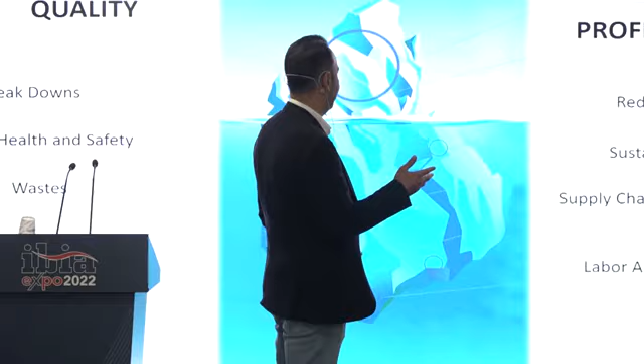All of us are trying to handle the business about quality, efficiency, and profitability, and this is like an iceberg, but there is another big part of the iceberg that we cannot see. If you want to get efficiency, profitability, and quality, you also have to fix many other issues to reach the perfect point.

The cost of a mattress is roughly around 87% from material cost, and 13% from labor cost and general production costs.

Where there is a product for the customer, there is a value stream, and the competition is about learning to see this. Some of the operations are non-value added and some are value added. If you can cut some non-value-added operations, you can fix your cost, your efficiency, and your quality.

Here I will mention three different aspects for efficiency: first is balancing, second is reducing the 7 wastes, and the third is work ergonomics.

Can we go back one slide? First, balancing. The red line is the takt time. Takt time means the period, the frequency of what the customer wants from you, and you have to balance all of your operations according to your takt time.

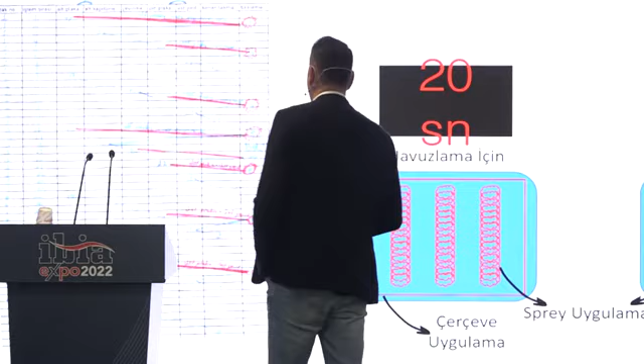So you have to look at all of your operations in detail, and for every step, for every second, you have to measure and analyze what the opportunities are to cut or combine operations together.

Here you can see one balancing sample. Before balancing, there is a small operation with 5 employees, and you see the unbalancing points in the graphic. You have to look, as I said, in great detail.

After the balancing, you can see the operation reduced from 5 employees to 4 employees, and the ratio of cycle time to actual takt time is 100%. So you can cut 20% from your labor cost.

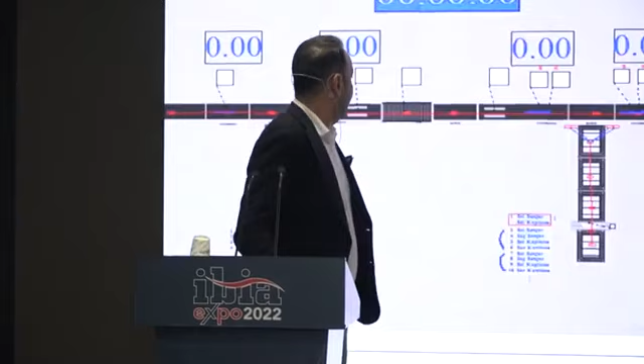And another point - yes, we said Human 5.0 - but you can also use some digital tools to understand and be sure you're making the right balancing with your operations. You can use different software like Rockwell Arena or Visual Components. Some of them have really nice HMIs.

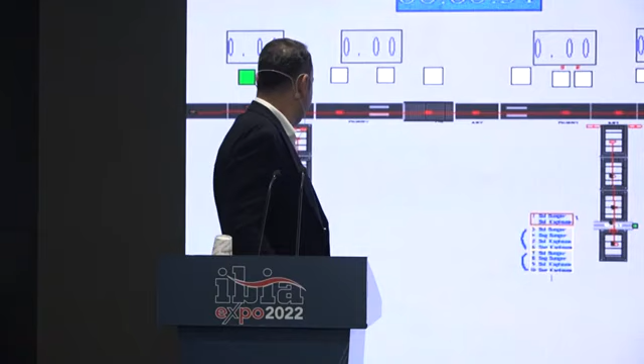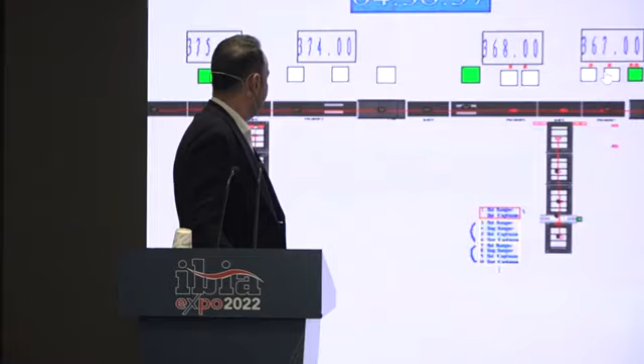This is the first simulation of our mattress line, what we measure before we design the mattress assembly line, to see how many mattresses we can produce. After that we sign the contract and go on to production. As you can see, it shows for an 8-hour shift how many mattresses you can produce.

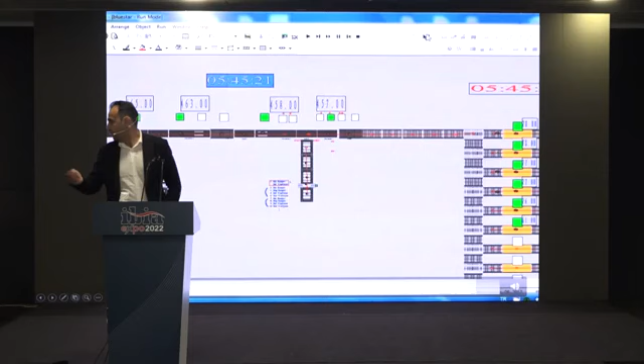Let's move to the next one. And the most important point after the simulation is that all the loading has to be equal or close for every workstation.

The second point is reducing the 7 wastes. It's a main principle of lean production, the Toyota way. Inventory - too much inventory is a waste. Waiting is a waste. Defects and reworks are waste. Overproduction, overmotion, transportation, overprocessing - all of these are the 7 sins for production companies.

So you have to look at where you are losing, which points make you waste and inefficient.

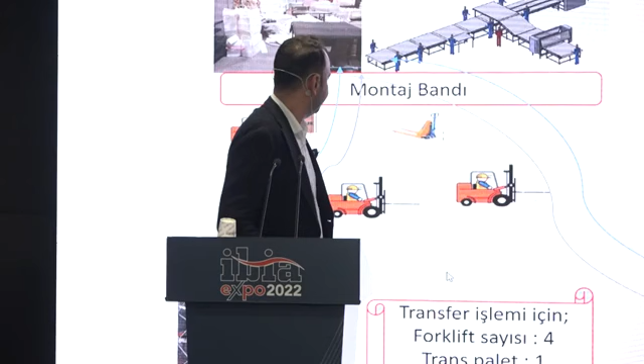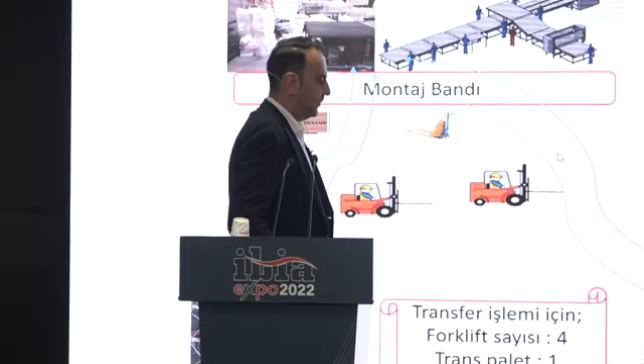For example, thanks to our team, they made an analysis about feeding the inner spring units to the assembly line. They made detailed analysis, spaghetti diagrams, and did brainstorming together, giving importance and assessing the difficulty of these potential solutions.

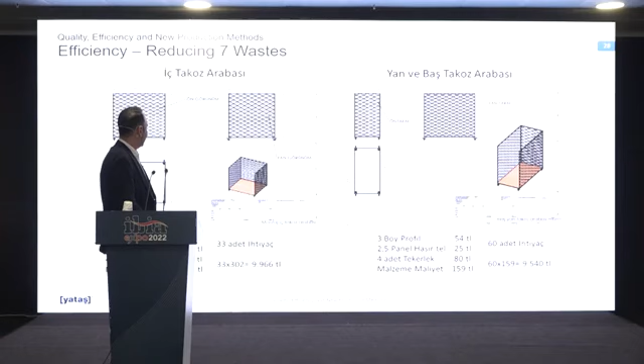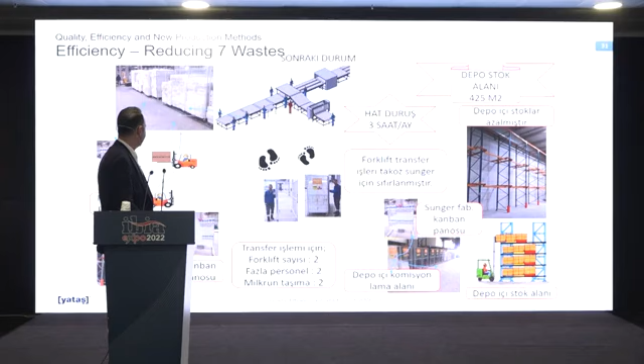After that, they accepted to start a Kanban project, and they designed special carriers for the side rails. They designed Kanban cards, and they reduced the over-motion and inner transportation to zero.

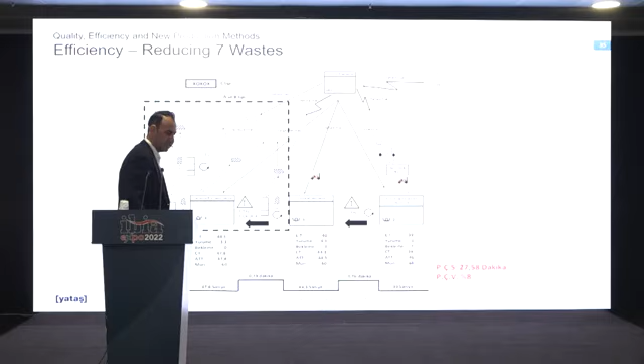At the second point, now you are seeing the value stream map for the current situation, and here is the next situation. They changed the system completely from a push system to a pull system.

Another important point is standard job. It means if any operation is made by anybody, every time, at any time, everybody has to do the same thing in the same way, in the same method, and at the same time. So it always aims to reduce the differentiation and the standard deviation from person to person, operation to operation.

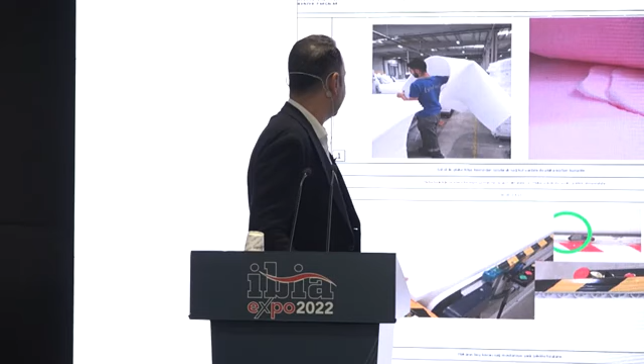And now you are seeing some of our standard operation sheets. For example, you can see what the tip point is to do this operation, where they have to be aware about the operation, what the critical point is, and what time they have to start and finish this operation.

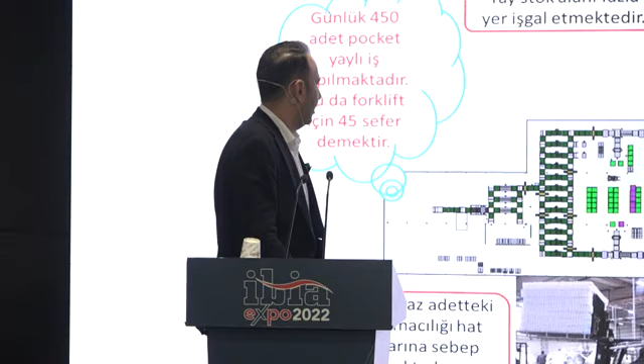Another point, they also saw a waste in moving and handling the roll pack pocket spring units to the assembly line. You see the spaghetti diagram.

They also made the brainstorming again, and they found a solution to integrate a bale opener and roll opener to the assembly line. They added some extra conveyor belts to fix the operation at the same time.

And you see the efficiency loss, the waitings decrease to 70% less.

The other point, as we are mattress producers, all of us are serving many different markets, and all the markets need different types of mattresses. Some markets need inner spring mattresses, some need foam core mattresses. This means much more SKUs, much more models, meaning much more changeover and much more setup. And every setup, if you cannot do it in a short time, means a break and an unplanned stop.

Now I will show you a video from Formula. First, you will see a video from the 1950s, and after that, you will see the new version of the pit stop at Formula from the 2010s.

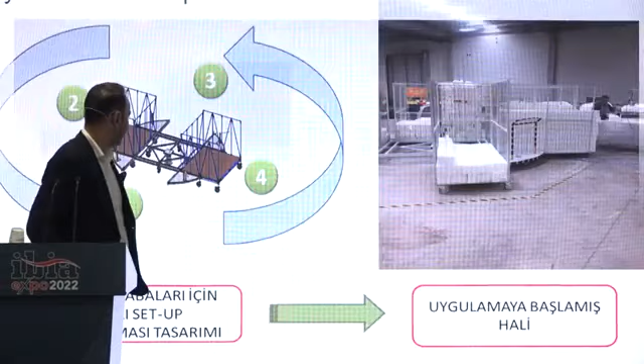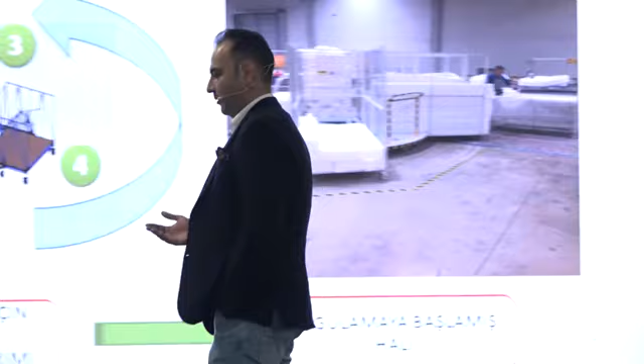So reducing the setup times and changeover times is really critical for our industry because of our product range and our product variety. We have to change from one model to one batch to another batch in seconds. So that's just a simple example of what they are doing at Yataş.

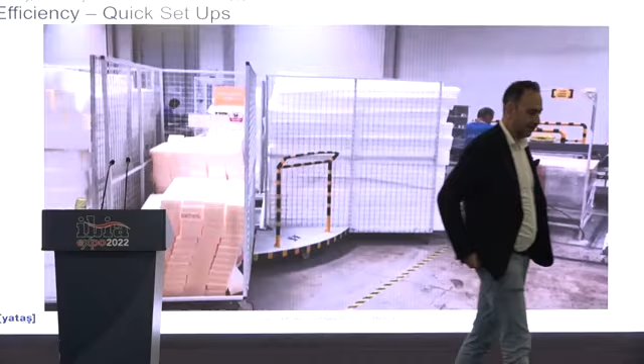We are producing 100% foam encased mattresses. This video shows one-piece flow and also shows SMED, single-minute exchange of dies. Now he's preparing the mattress side rails, and after that he's changing to another model, another size, so he has to use other side rails.

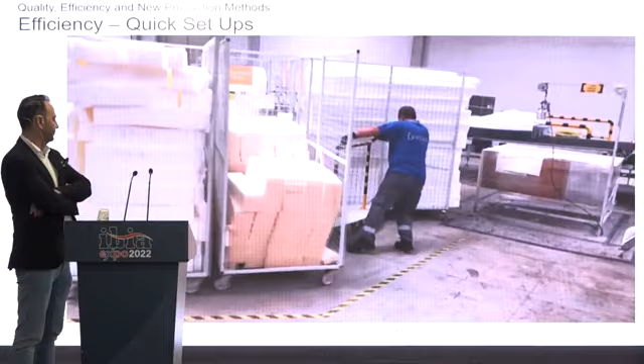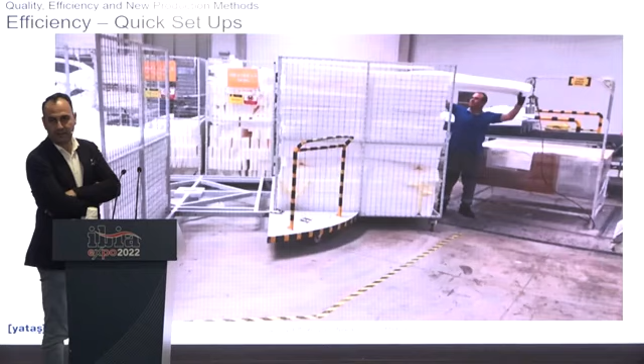Now he switched the other batch to the other size. It's easy and lean.

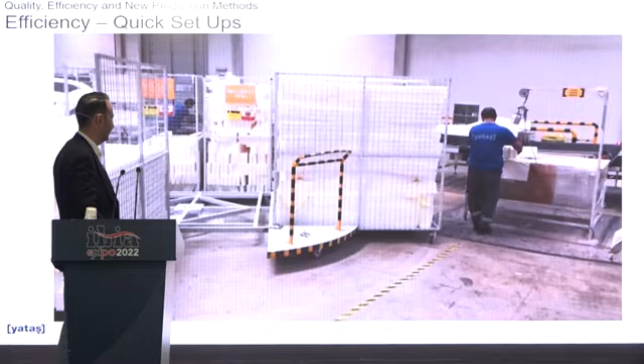Another point is we are working with really expensive equipment, and every piece of equipment has too many different electronic sensors, some controllers, too many mechanisms, too many mechanics, and you have to care about the condition of your machines for maintenance.

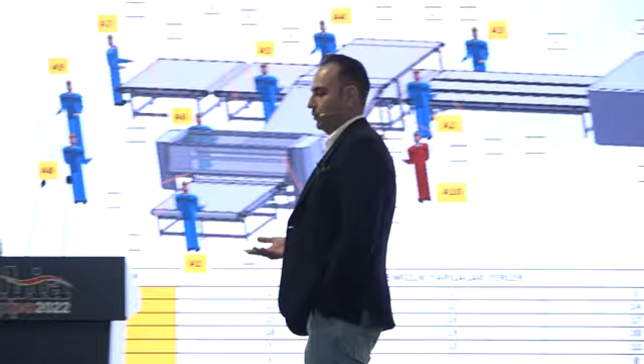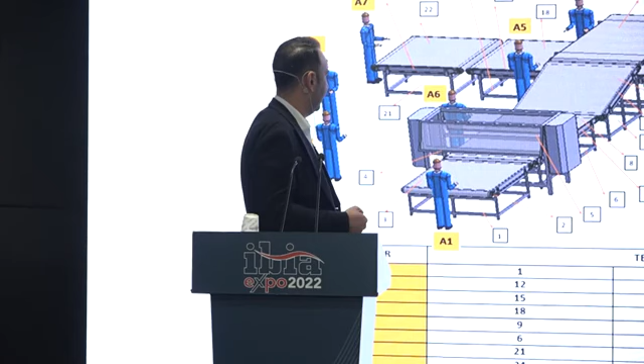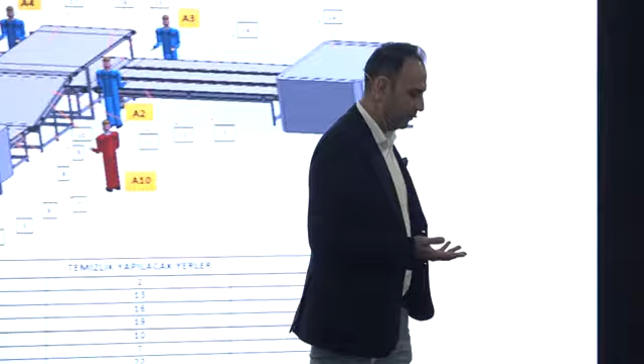With unplanned breakdowns comes unplanned stops, meaning efficiency loss. So to reduce breakdowns, broken parts, and sensor issues, you have to clean your machines, control the critical points of your machines, tighten some of the screws, and make regular lubrication to reduce the breakdowns.

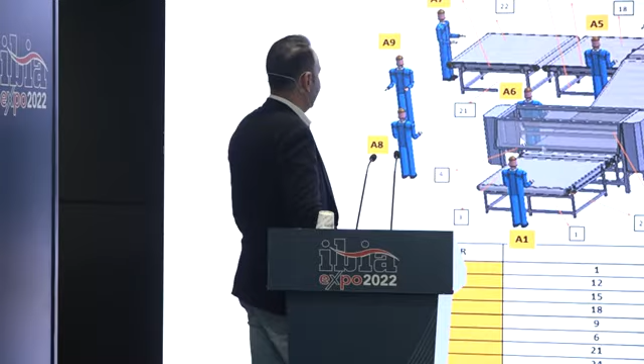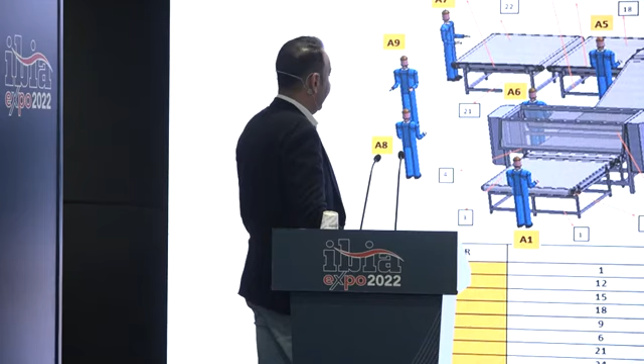And now, at this assembly line, you are seeing every person has a number, has a code, and every person, every shift, at different days, they have to clean different points, they have to check, control, tighten, and lubricate different points at the assembly lines.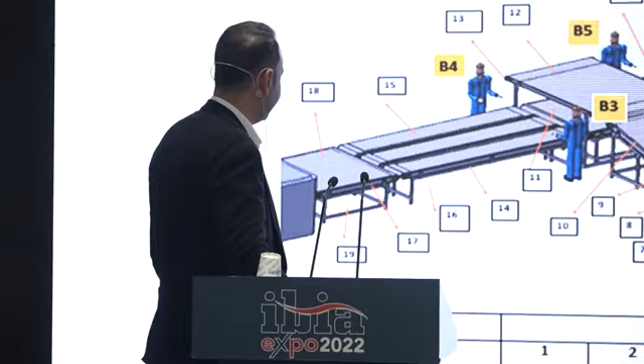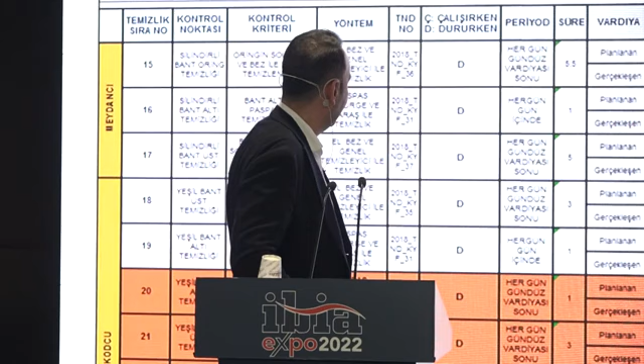We are detailing all these points, how they have to clean, what they have to use, and we are giving detailed one-point lessons. And you see the trend of these timing lines, how that's going.

Another point is escalation. If there is any break, any unplanned stop, there is an escalation chart to inform at a path. And Lord Kelvin says, if you cannot measure it, you cannot improve it. Peter Drucker, the famous management consultant, says if you cannot measure it, you cannot manage it.

So manufacturing execution systems and IoT, also Serkan mentioned at his presentation, is really important for us to see. We are collecting data from our production lines, and also another point, we have an andon button.

If there is any abnormality, if the person sees any abnormality, he is pushing this button and we completely stop the line. We have a horn and a lightning, and the supervisor of the line is going to that point and asking, how can I help you? We call it stop for don't stop.

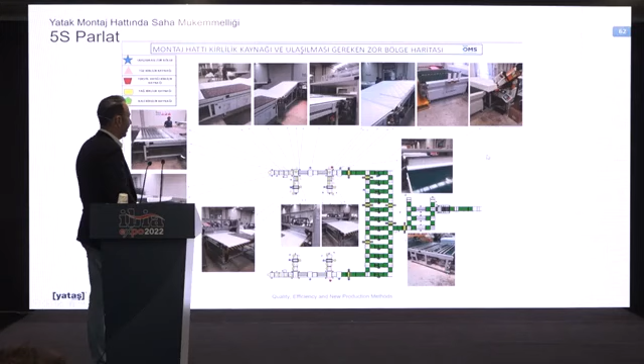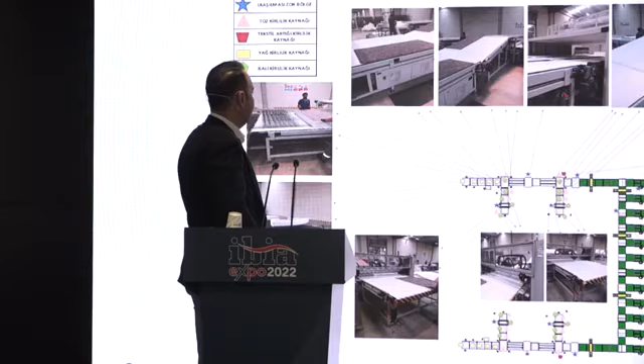Here you are seeing a map at which point of our production lines, what kind of dirtiness sources we have, and we are measuring how many minutes we are expending to clean these points and to control these points, and our aim is to reduce the source of the dirtiness.

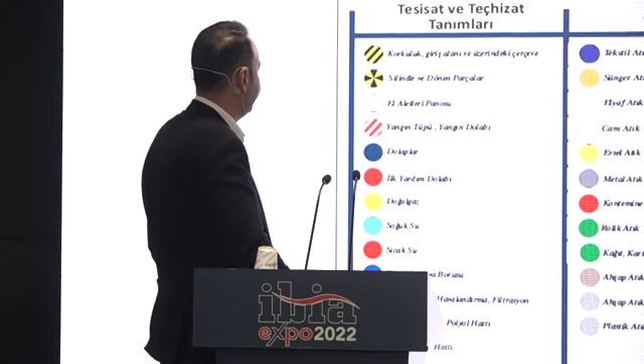Here is another example, and this is our visual plant standards. Some of the examples from our 5S applies.

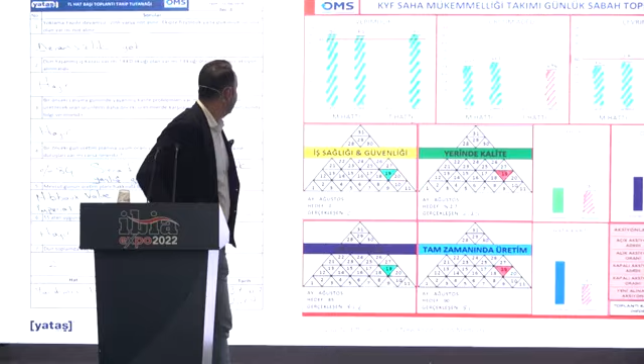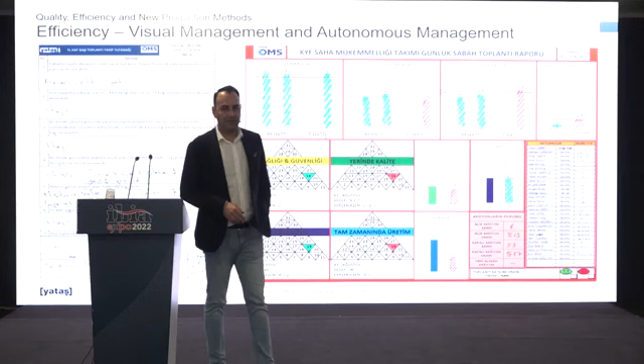Also, another point as I mentioned before, visual management and autonomous management. We are collecting data and we are looking at reports, and we are talking about it, what we can do together to solve and do it better.

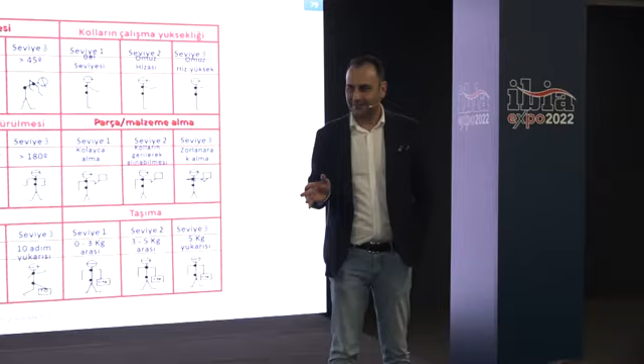Another point is work ergonomics. Yes, as the mattress industry we are better than the furniture industry, we have much more automation and automated products and machines. But we are still using too many labor and manpower, so ergonomics are so important. You have to look at all of your operations from the ergonomics perspective.

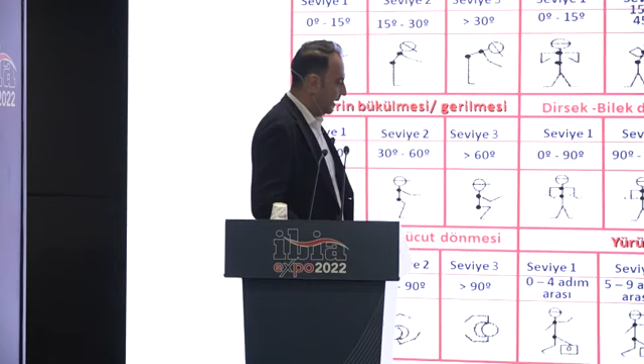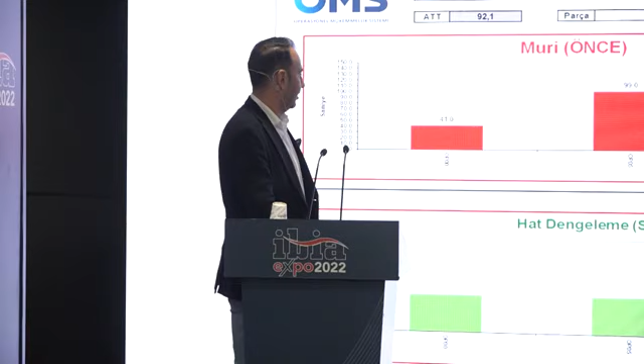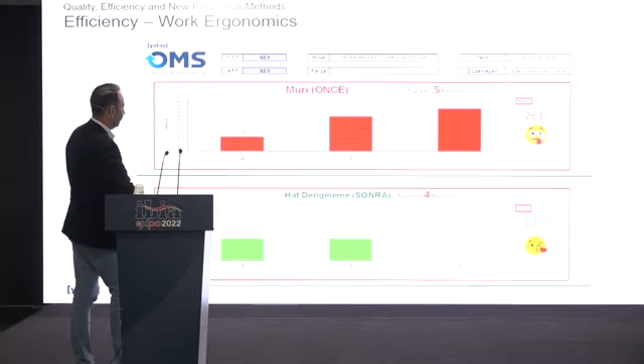As you can see from this chart, every motion, every position has a hardness point, and you have to look at your operations. This is before the improvement; the total score for these three operations was 261, and after the improvement we came down to 120. We balanced the hardness of the operations at every station to be the same, and we also eliminated the third operation.

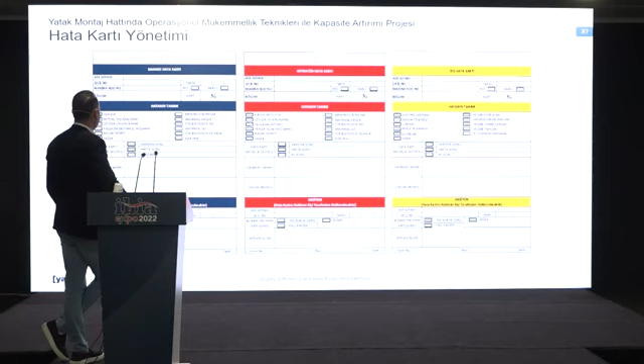Another point is autonomous maintenance, also called TPM, total productive maintenance. These are the fault cards. We have three different kinds: the blue ones for the maintenance guys, the red ones for the operators, and the yellow ones for health and safety for the labor. These are the most important ones.

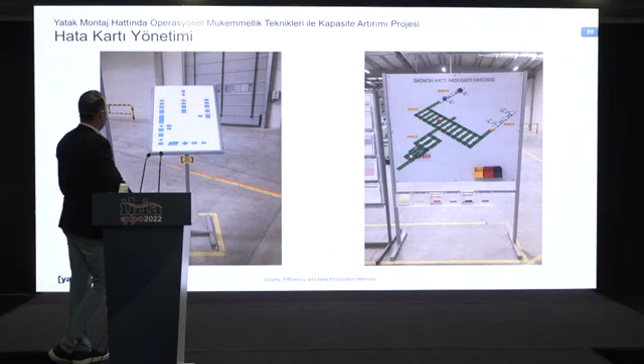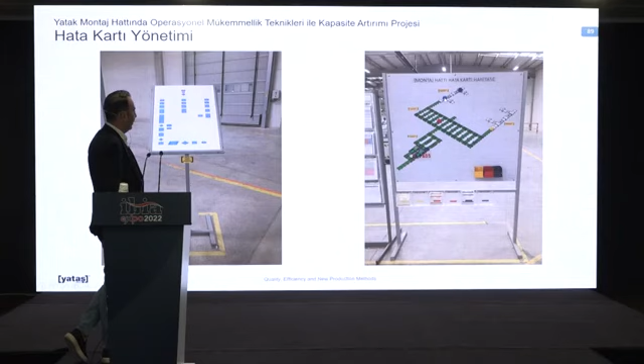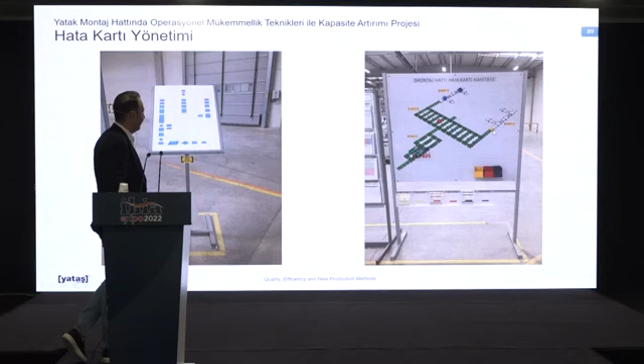We have to solve the yellow ones the same day. We use these cards, hanging them where we see the problem, and also pointing from the layout. Now you are seeing 1, 2, 3 maintenance fault cards, 1 operator fault card, and 1 health and safety fault card. This graphic shows when we hang the card and when we unhang it.

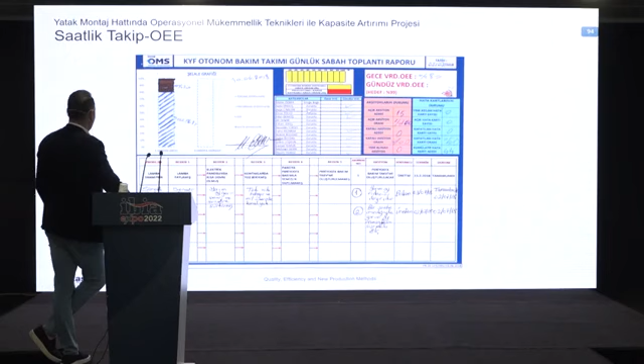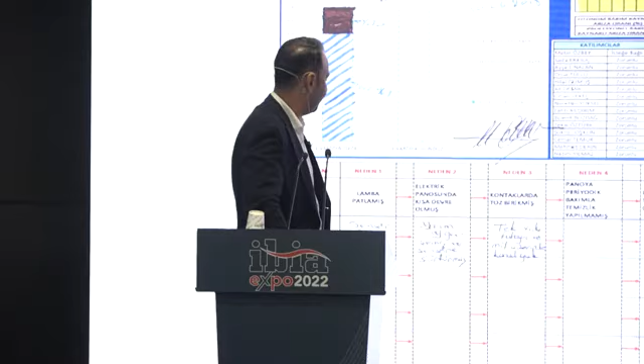Also, you have to talk about maintenance and the breakdowns for the machines. We talk every morning about every problem with the maintenance. If we had a problem, we always ask 5 times why. This 5-why analysis always aims to find the source, the real source of the breakdown.

You are seeing little kaizens from the Gemba.

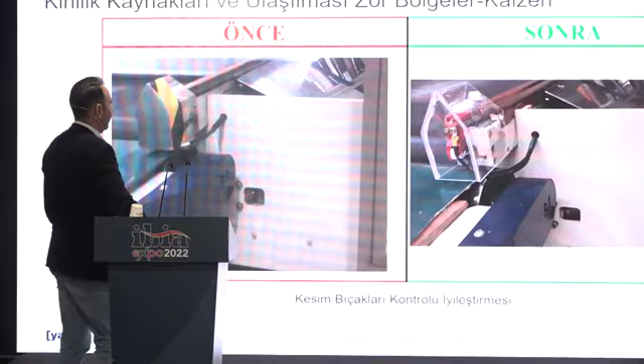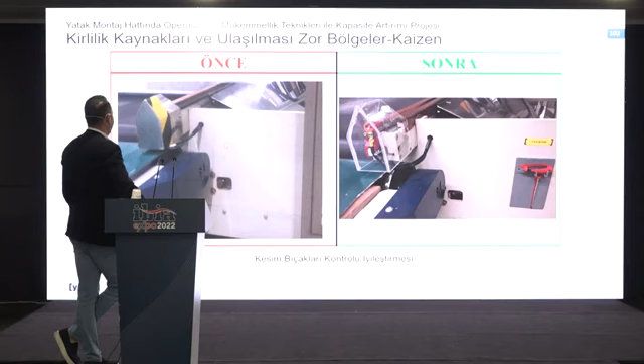There is another kaizen. Before, we couldn't see inside the knife unit, and if there was a problem with the angle of the knife, we couldn't sense it. Now, if there is a problem, we can see it.

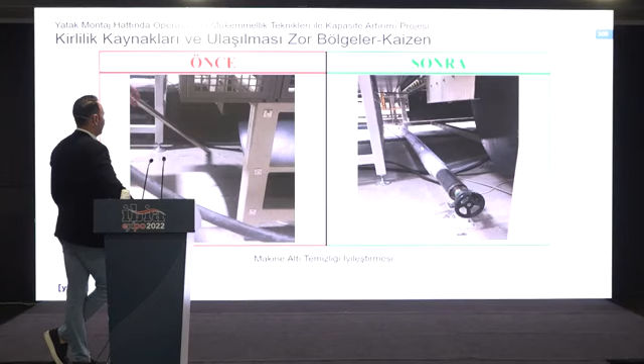And this is another kaizen to clean the bottom side of the machine.

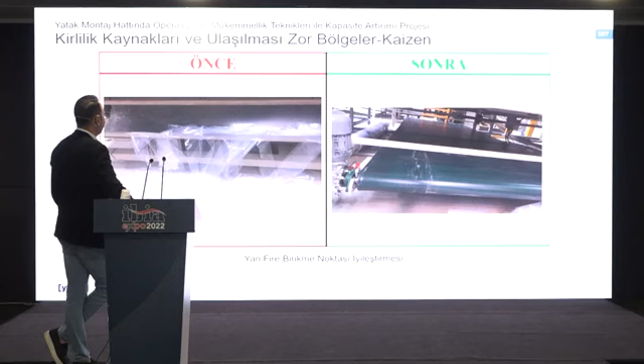This is a kaizen to collect the side waste of the polyethylene film. This is another kaizen to fix the lubrication and control points of the machine.

From 30 minutes, we decreased the time to 8.9 minutes.

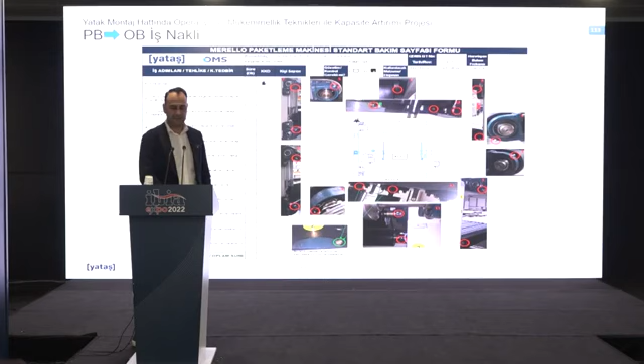These are the standard maintenance sheets for our maintenance guys for critical machines and critical parts. If there is a problem at that critical machine, every maintenance staff is making the right operation, as written here. And these show the lubrication points.

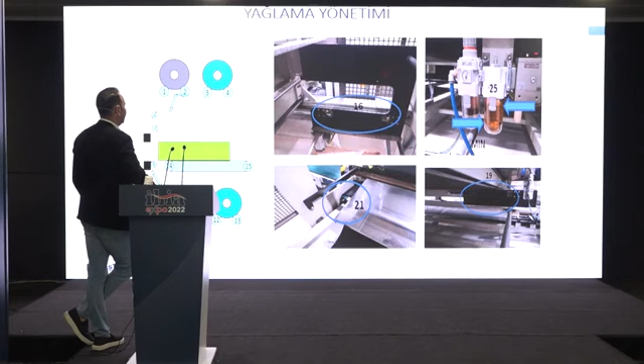These are the kaizens from the fault cards. We hang fault cards, as I said before, and after that we unhang the fault card with a kaizen. We are always standardizing a problem - that's our aim.

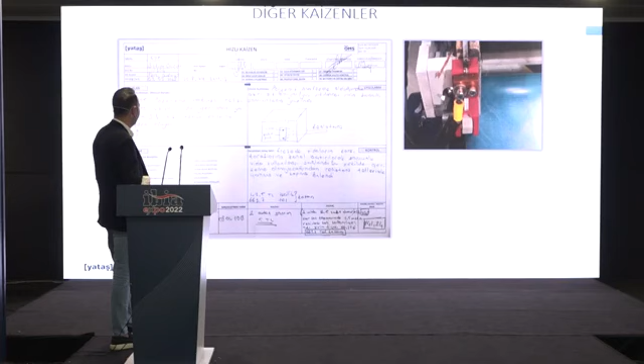These forms show what the problem was, what the maintenance guys did, and the source of the problem - 5 Why analysis. You see there was a problem with the resistance connection, and they fixed this problem with this kaizen.

We are also making some surgery operations on parts that we change after a breakdown, and we are looking at the part to see why it broke.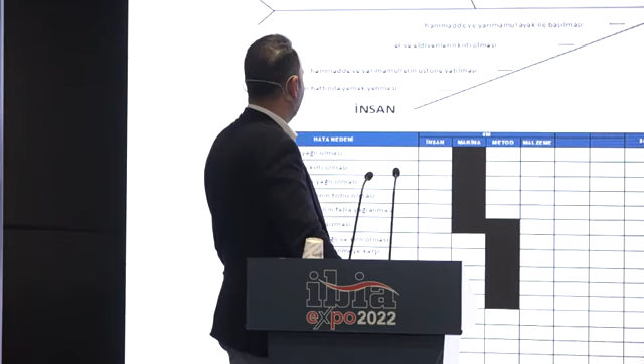These are the quality tools we are using. We always use the 7-step quality method. First, we define the problem. Second, we analyze the current situation. Third, we set the targets after the kaizen, what we are aiming for, and after that we do the root cause analysis.

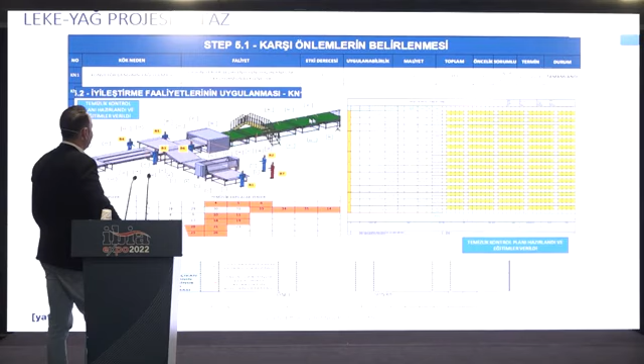We find the solutions, potential solutions, and we implement them. After that we check whether it solved the problem or not, and we standardize again with the standard operation pages.

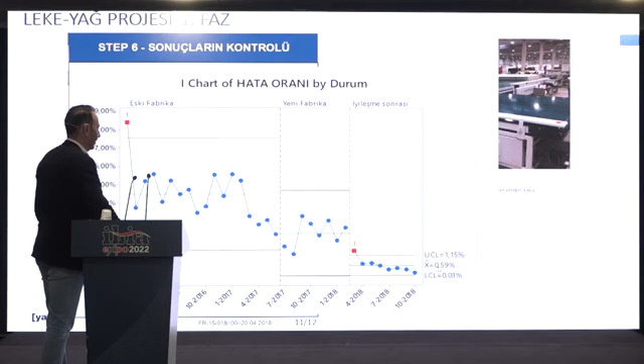For this quality problem, it starts from 4.5 and we close it at less than 1. And this is the standardization.

Another problem about tape edge quality, another kaizen project about the tape edge problems. They always follow the same path.

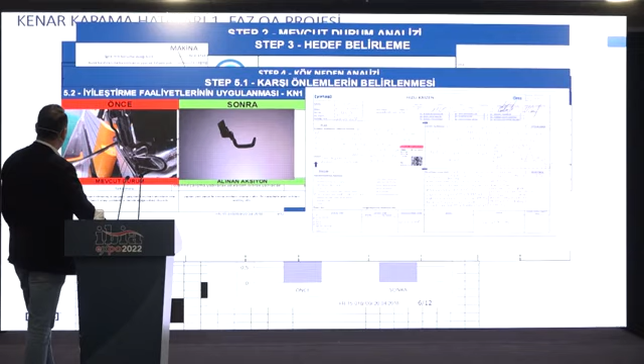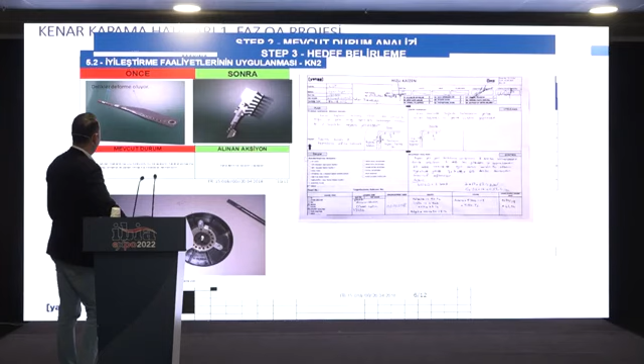You are seeing some improvements to solve this problem. They added a guide for the tape edge operator here. They changed the looper, they changed the needle, and fixed it at the standard operation page. They changed the apparatus, and you see from here, from 5% to 1%, they arrived at solving this quality problem.

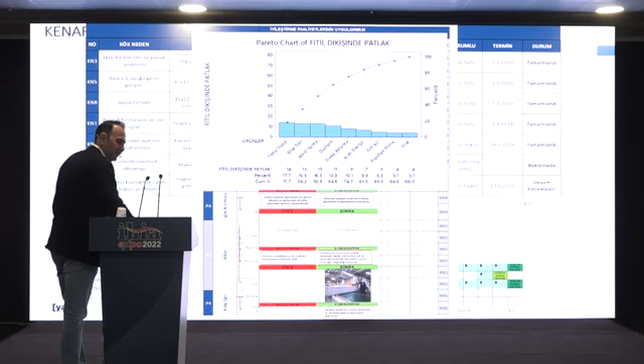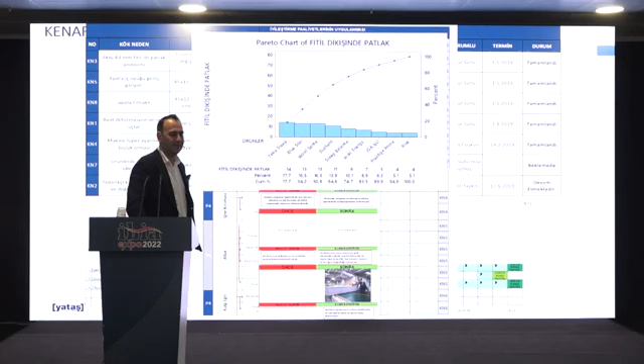This is another problem about the tape edge. The main issue about these improvements is that we always make them with the team, because the operator knows best, from whoever is doing that operation. We always believe that.

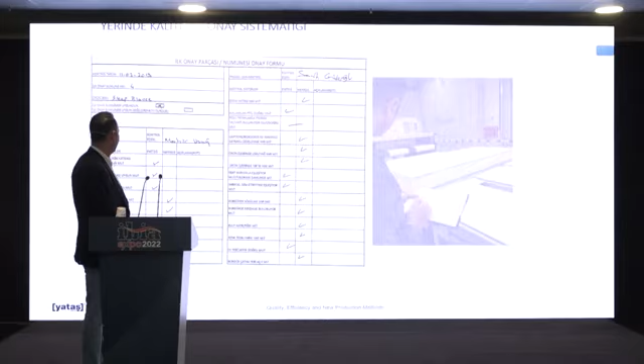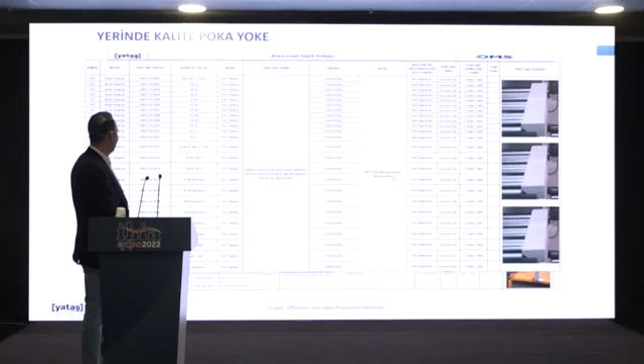This is some poka-yoke samples. We always make maps of our poka-yokes, and we always check whether they are active or not.

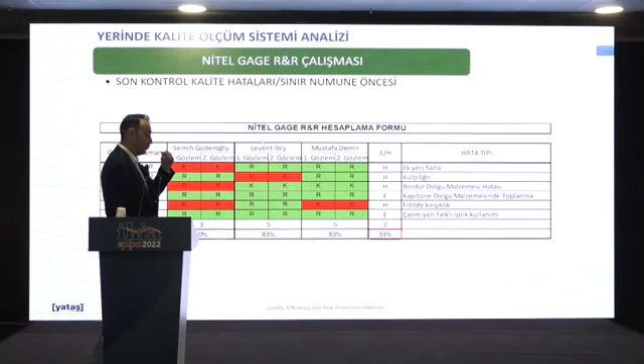These are the limit samples, because we make the quality control by the human eye, and somebody says this is okay, this can pass, and somebody says this cannot pass. We also compare the quality control operators about their decisions on the samples, to see if they are saying the same thing or not, and if there is a problem, we give education and we fix their eyes about what can pass or not for that issue.

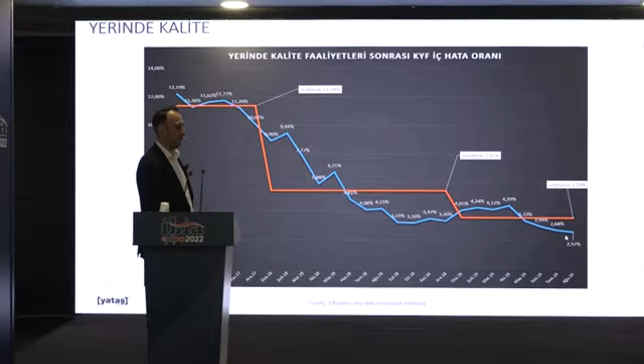In 2017, we had a 12% rework ratio for quality at the quality control line. At 2019, we came to... and this year we are going to 1.95, below 2%. So 5 times we reduced our rework ratio with teamwork.